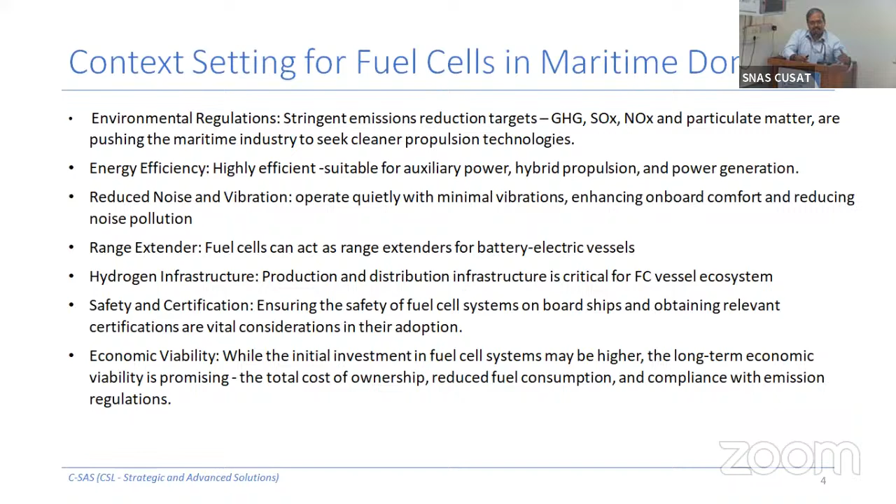Secondly, the energy efficiency is highly efficient when you compare it with IC engines and related technologies. The efficiency we have now is around 56%, and we can extend it further by absorbing more heat from the other process parameters.

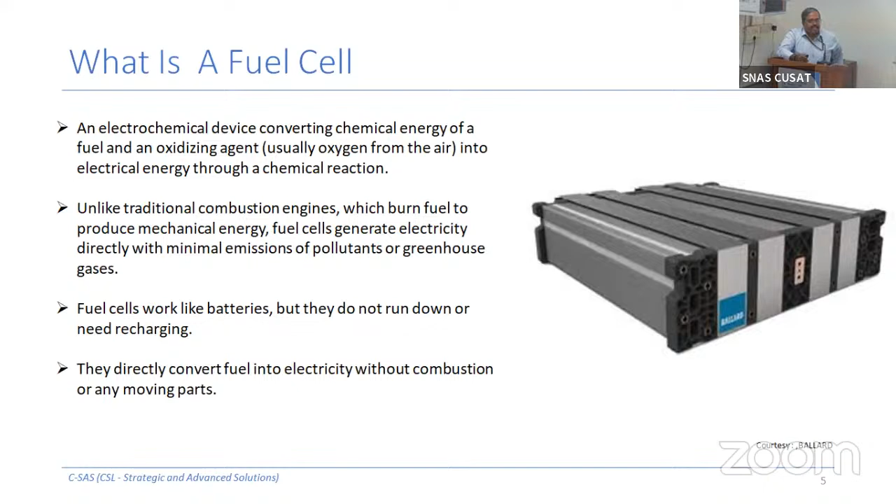I think this has already been covered. What is a fuel cell and how does it work? This picture is actually a fuel cell stack supported by a company known as Ballard.

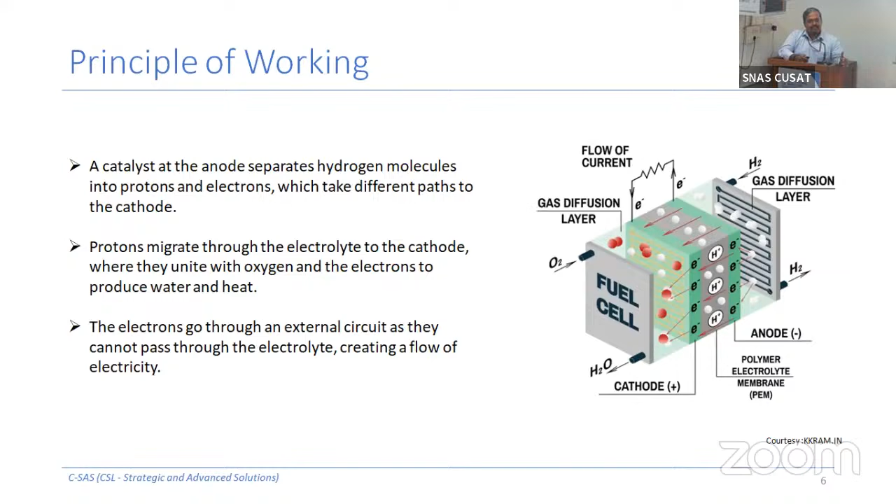I will also skip this because I believe the working of the fuel cell has already been covered. So this is very important, you see here.

Typically, an installation of a fuel cell on board a ship comes in the form of a 40 feet container with one part handling the fuel cell, known as the BOP, balance of plant. This will be a fuel cell plus a battery part integrated onto it. So you will see only a container on board the ship.

It is something like a plug and play system. If you are planning to integrate within the engine room, then this entire fuel cell stack and BOP will be a fixed component. You can either do it as a containerized solution or a fixed solution, but typically what we have seen is that the adoption is happening with respect to a containerized solution, so that the entire thing can be plug and play.

So we will also understand what are the typical fuel cell technologies which have been experimented over a period of time in the maritime space. This proton exchange based solution - from international research we understand that specifically the proton exchange membrane and solid oxide are the two promising technologies which have been leading the show.

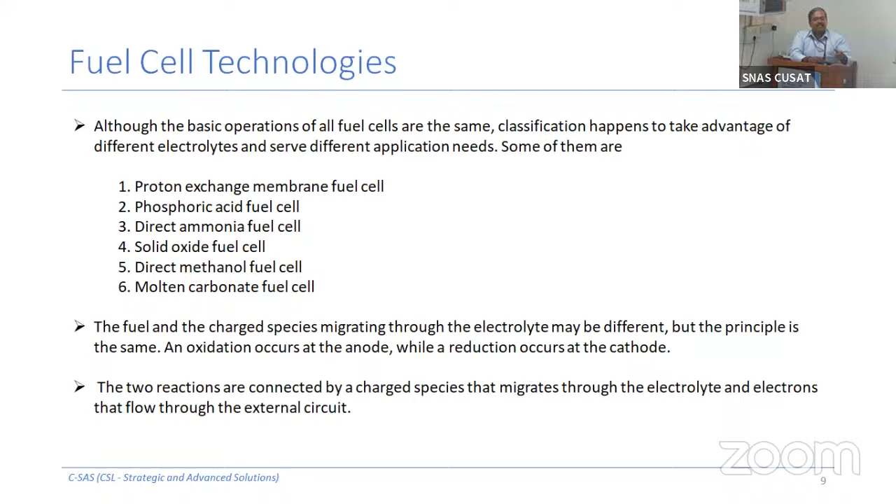So what was happening was that when we had initially envisaged this solution and were ready to start the trials, nobody was willing to onboard the ship, because people were really scared and had a feeling of fear. So we had to do a lot of sensitization, and we also needed to create standard operating procedures to ensure all the people and the safeties are compliant. So it was a cultural change which happened in the shipyard when we were doing this.

Second, you also have to understand, when we are putting something on board a ship, it should comply specifically with IMO, the International Maritime Organization Convention and Codes. Then there is the International Association of Classification Societies, IACS, and IRS is also a member, and IRS partnered with us in this project. So there are a lot of international standards we need to comply with, and we also need to comply with technical standards such as ISO, IEC, and IEEE.

So initially, for all these things, we do something known as a gap analysis. We analyze each subsystem to check whether it complies functionally with the relevant class standards. If not, then we take methods so that the gaps can be mitigated to ensure the system is compliant for a maritime use case.

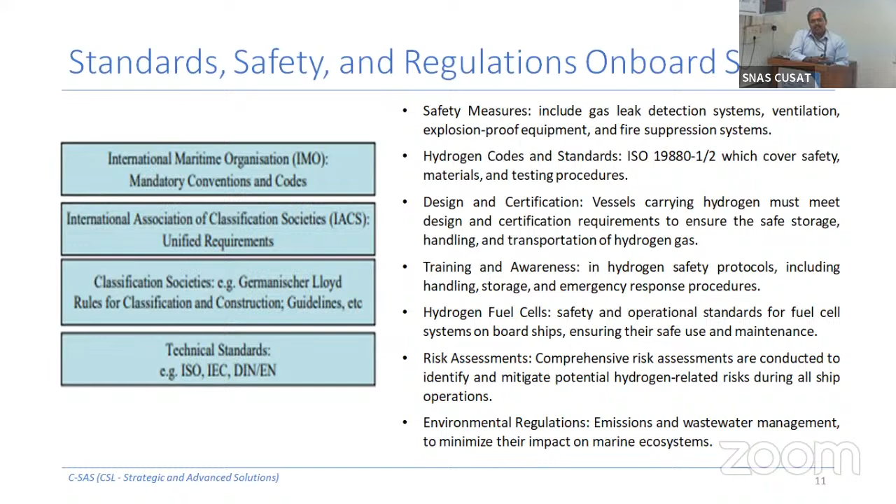The next part is that once we are done with the gap analysis, we create a solution useful for the maritime use case. First, we try to understand the operational condition and profile of the ship: how many hours it will normally run, how many hours will be available for charging, what infrastructure will be available, whether a battery-based solution will be available, whether shore charging will be available, how many continuous hours will be required, what is the endurance for the ship, and do we have a possibility to recharge the hydrogen on the go.

Based on all those things, we choose the fuel choice and the hydrogen supply system. The third point is very critical - we have to understand the footprint, that is, the weight and sizing limitation. This is a very critical thing.

As you are aware, from the propulsion and sizing perspective, the propulsion train will typically require a minimum megawatt range power to create this kind of long duration, long endurance solution. Based on that, we have to select the fuel, whether we will use gaseous hydrogen or liquid hydrogen, or a hydrogen carrier, so that we can optimize on the footprint.

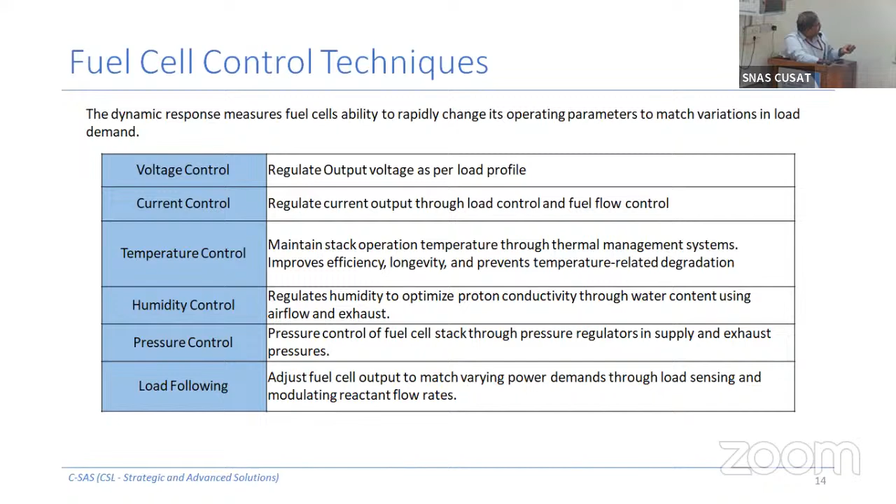In a similar manner, we have done the temperature control, humidity control, and pressure control. Now, this is a very important slide because these are the critical integration facilities available, since the fuel cell is comparatively slow in responding to peak power load. We can use any of these parameters or options to ensure that it responds to the dynamic load requirement.

In our case, we have used batteries. In future, probably we will use a combination of batteries and supercapacitor, because if we use supercapacitors, the advantage is that every battery has a minimum number of charge and discharge cycles available. So if we combine it with a supercapacitor, the battery usage will be reduced, giving a more optimized solution. Typically an LFP battery will have a life cycle of around 3,000 cycles. If we use a supercapacitor, it has 1 million cycles.

But you have to also understand, we cannot give up the full power in kWh to this supercapacitor. So we will use it for a very particular, limited capacity only. Since supercapacitor is very expensive as per current technology, we will use it in such a way that it becomes a hybrid battery, ensuring that response to the dynamic load is curtailed mainly around 80% by the supercapacitor. If that is not sufficient, then only the batteries will be used, giving some breathing space for the fuel cell to come up to that level using load control.

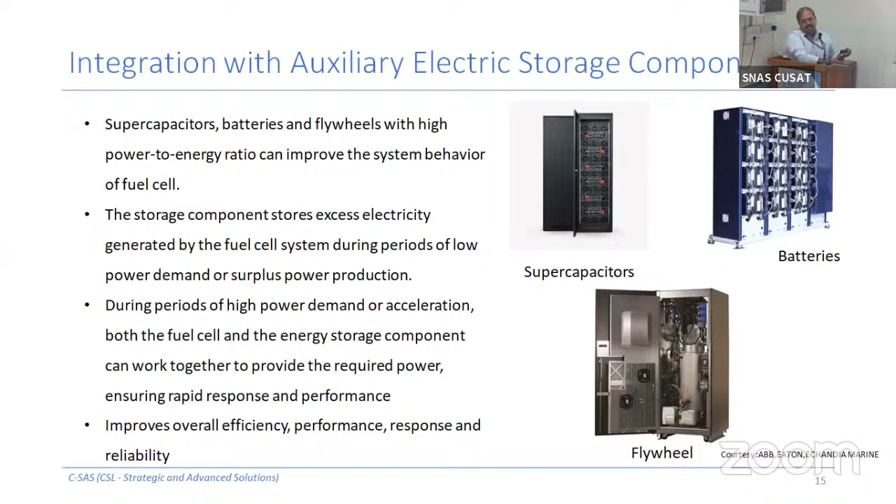Coming back to the typical powertrain, how it works is we will initially have the hydrogen storage. This will be limited, as we have discussed, whether it is gaseous, liquid form, or through some hydrogen carrier, limited by the profile of the vessel. Then we have the fuel cell modules. Then we have batteries, switchboards, and power electronics, with the shaft and the propulsion system coming into place.

So now coming to the actual thing. This is the project we have conceived, and I'm very happy to be leading this team for doing this solution. We can proudly say that it is a full homegrown technology.

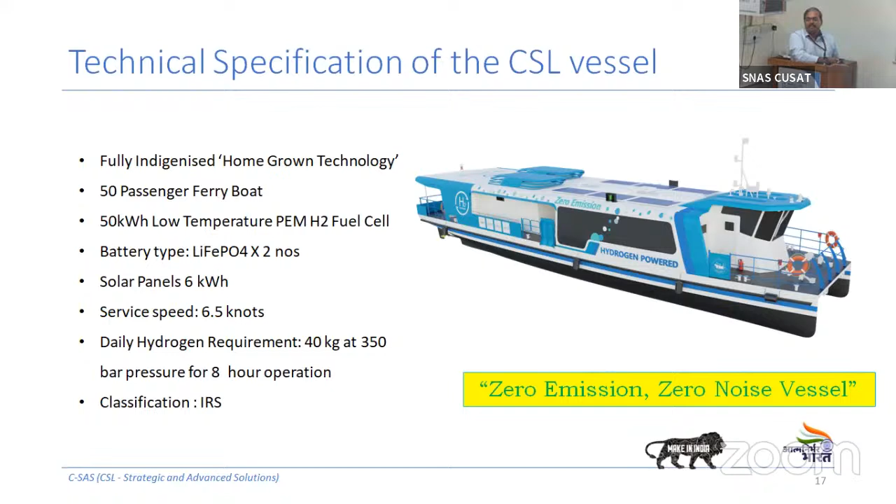So what were the hazards we have identified? First one is that high energy collision penetrating the hydrogen cylinder. So what happens if there is a vessel collision happening, the Type 4 cylinders what we have used will survive those things. And if there is a problem happening, there is some air venting mechanism which will do a controlled venting, so that since it is only 40 kg, it will be vented within a very short period of time. Rupture of cylinder is also handled in the same manner.

Vessel collision penetrating the fuel cell power installation: if some internal leakage happens, then the entire solution will shut down. And if there is a leakage happening in any of the valves or connections, we will detect the loss of hydrogen. If that rate is coming very fast, then we will shut down the solution. And when we are bunkering the hydrogen, if there is a leakage happening also, the system shall be shut down. And failure of electrical power conditioning system.

That means assume that when the vessel is running and the fuel cell is fine, but the output unit failed. Fuel cell is fine, but this one failed. Then what happens is that we will shut down the fuel cell and the vessel will run on batteries to the nearest port. So all those things we have actually modeled, and we have identified that these are the hazards available.

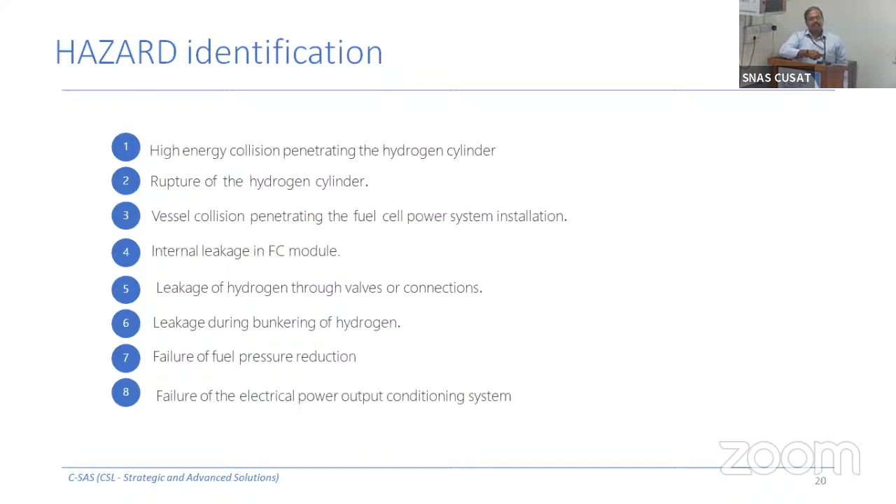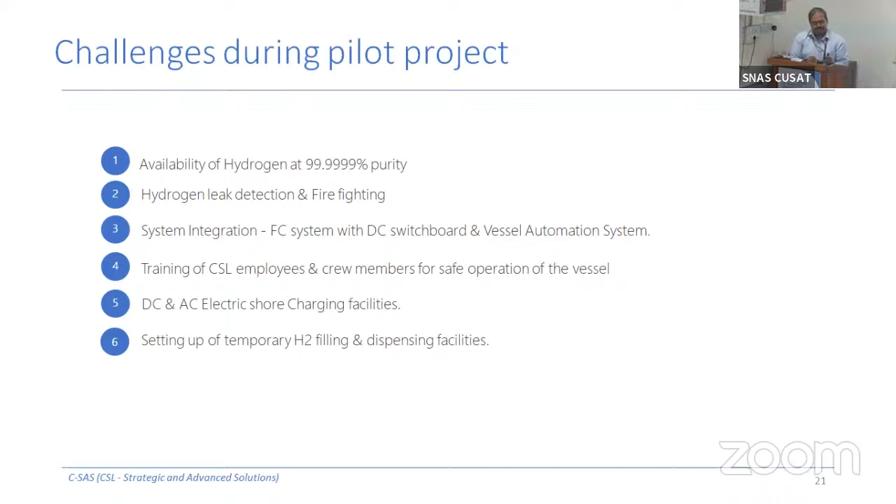Another very important thing was that since the fuel was not available, we had to set up a temporary fuel filling and dispensing facility, which we got approval for from PESO. Since we were only doing 40 kg, they were not very stringent about it, but we still had to do a lot of work to create that. With that, I conclude my presentation. Thank you.

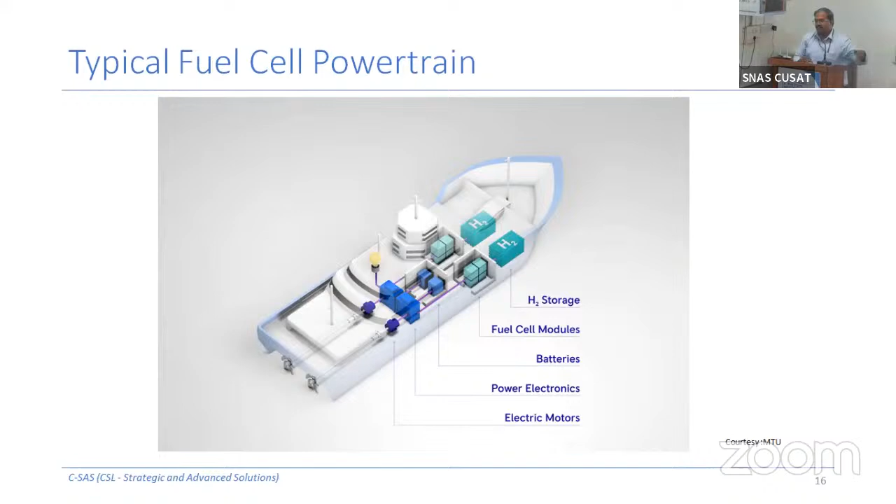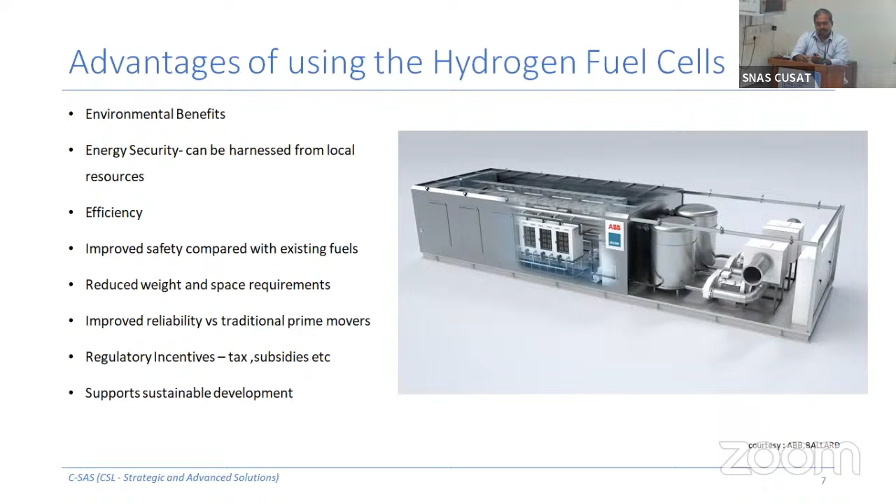So this ship is working in a hybrid mode or is it completely fuel cell? It is always in the hybrid mode, because when it is running, the load demand from the propeller is actually transmitted directly to the bus. So this bus will have the variance, the power will always be varying. That variation response will be done first by the battery, because the battery is directly connected. You just discharge. So our choice is to ensure that when it is discharging, we compensate that rate to ensure it will not discharge beyond a point, so the depth of discharge is limited, and the state of charge will always be maintained between 85 to 65.

So beyond 65% means the state of charge is available for 65%. Beyond that, we will not try to discharge typically. If everything goes bad and this is not available, the battery can discharge up to 20%. State of charge will be 20%, meaning 20% energy will be available, because it is required so that we can take it to the next port. And the important critical thing is that if deep discharge happens for the battery, it is very dangerous.

And one fuel cell layout you have shown, in this SLD, it is mentioned that you have to maintain fuel cell stacks at 60 to 80 degrees Celsius. So if you're not doing this cooling, heat transfer cooling, what will the rise of temperature be? What happens is that if the temperature can go up to 85, then we'll trip the system. That is what we have done.

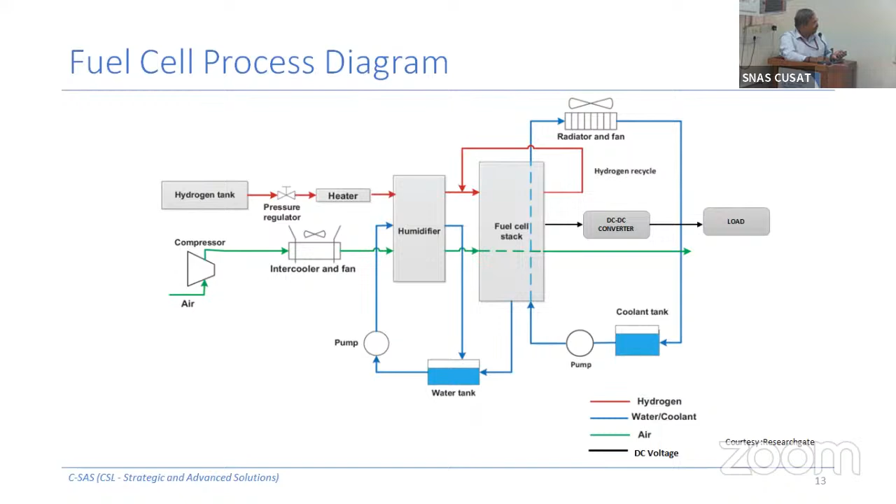See what happens is, let me tell you frankly, when we started this project we were thinking that DC switchboard was very easy, because we have years of experience in AC switchboard, there was no problem. But it was absolutely wrong. That was the hidden risk we understood, because even though DC bus doesn't require any synchronization, since DC bus means there is only positive and negative, there is no phase, we thought it was very simple.

No, the selection of the contactors, we need to select something known as pre-charge. You cannot simply close the battery terminal voltage directly to another battery. You have to do it through a pre-charge. All those things, if the timing is not correctly done, we will lose that cell. And the selection of the fuses, those were semiconductor fuses, because it has to respond fast. The tripping of the things is based on semiconductor fuses, which act very fast. So that was a hidden risk.

Now, if tomorrow we use new techniques for these things, then this is an added parameter in our existing timeline, which we may not succeed in, because that was not the primary motive. Our primary motive was to prove that it is possible to integrate a fuel cell on board a ship. That was the primary motive. So we didn't do that. Probably in the next optimization, we may do that.

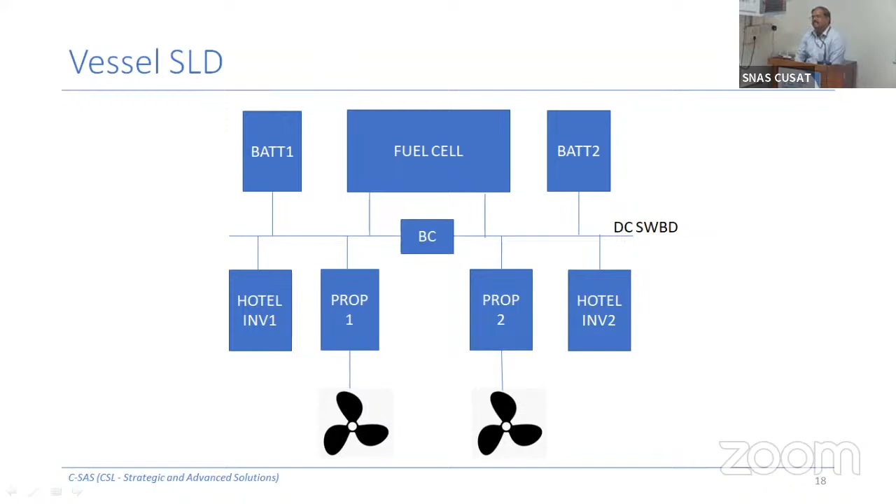Thank you very much, sir. Thank you for a wonderful talk. Listening to one presentation from an academic institution and another from an industry is very nice. Thank you very much.

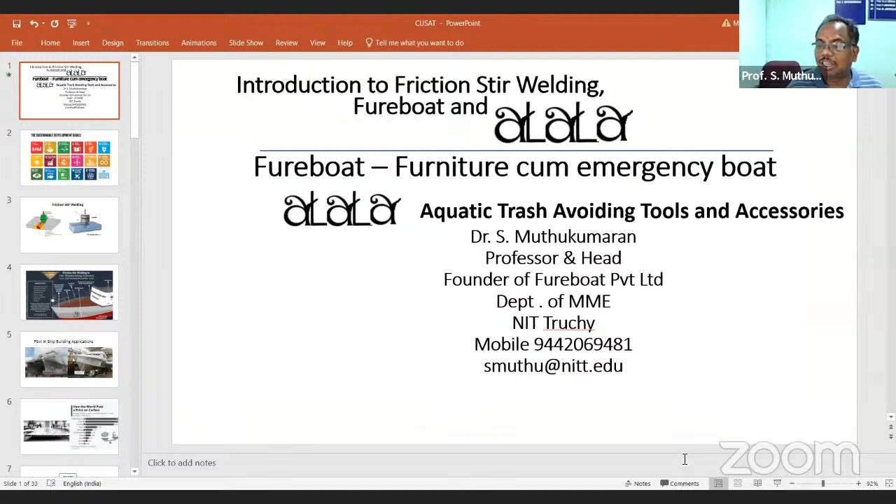First of all, I am thankful to Professor Madhiyadagan, the head of the department, and Professor Sivaprasad, sir. I have been collaborating with them for nearly 2-3 years. Professor Madhiyadagan belongs to NIT Trichy, he is also an alumnus of our NIT Trichy, and I'm happy that we have very good collaboration, and I'm sure it would continue. Now I am going to highlight friction stir welding, Fureboat, and trash removal equipment. I felt I am an odd man out because I am less related to ship work, but I can share my experience and contribution at this forum.

We now have the Sustainable Development Goals. The UN gave these goals because due to climate change we are facing a lot of issues - frequent flooding, like the heavy rain happening now in Chennai. This has become common. Some countries faced five floods in one year. The UN is very keen on addressing climate change, which is a very big issue. There are 17 goals; among these, life below water and climate action are very important. Climate action is very important, and the ship department plays an important role.

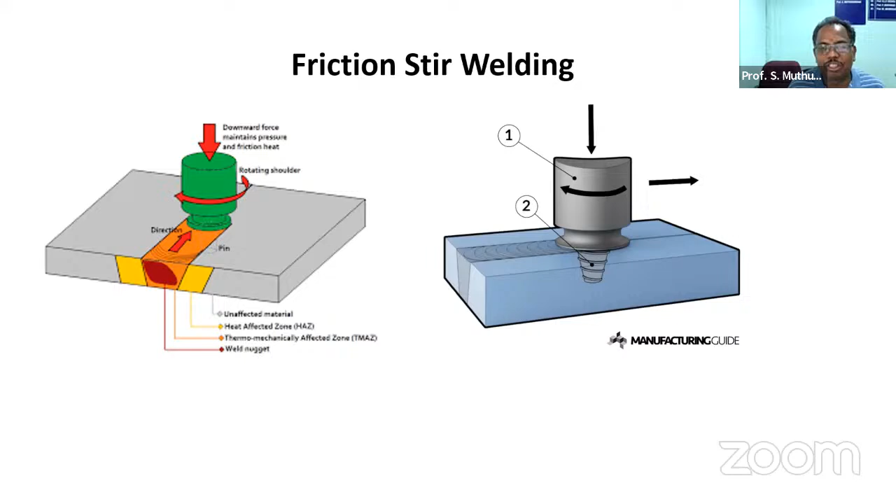Yes, we can do some innovation. It's not that only people in the US or NASA can do this - we can do it from India, we can do some good work. That gave me a lot of confidence. With this confidence, I did some work. Let me share those works.

In shipbuilding, I hope most of you are aware of the friction stir welding process. I'm not going in depth about the process - basically 2 plates are fixed and the tool runs. That's all - there is no filler, no shielding gas.

There is no hazard, no fume hazard, because metal arc welding gave rise to more than 35 diseases due to the health hazards it carries. But here there's completely no smoke, no melting, and when metal melts, a lot of issues happen like oxidation - here there is no oxidation. We have many advantages with this process.

Even a 30 mm thick plate we can weld in 2 passes. There are a lot of advantages - some other occasion, let me give an exclusive presentation on friction stir welding. Now let me highlight only the application point of view.

In shipbuilding, yes, it is widely used in developed countries. These are some of the components - we can weld honeycomb panels, hull, deck. Particularly aluminum is very simple to weld because the tool design is very simple, but steel also, people are now successful in welding.

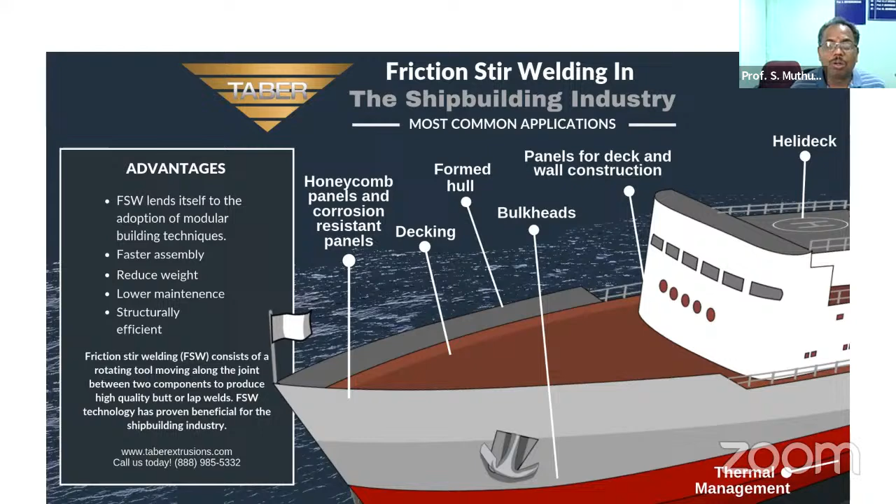Even oil pipelines are welded nowadays by friction stir welding because there is less energy consumption. This is actually a ship - wherever you see a line, that is the place welded by the friction stir welding process.

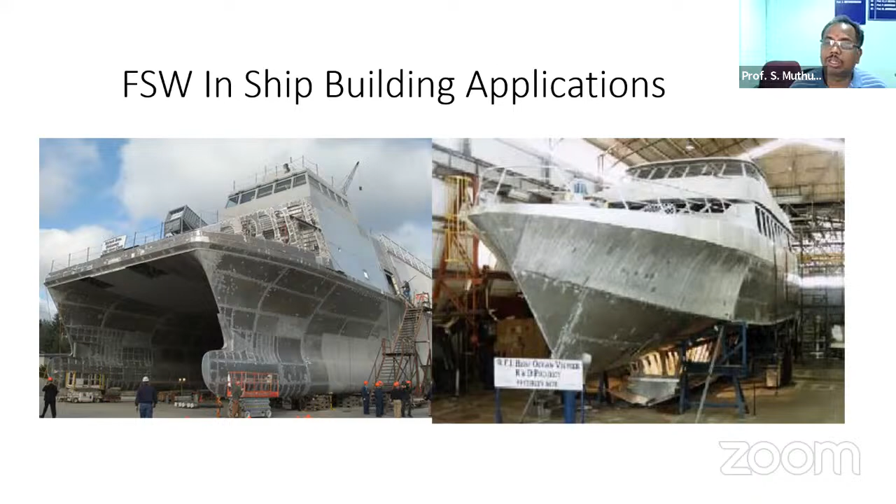It may not be feasible for us to manufacture a complete ship right now in our country, but at least we can plan some panels - at least some of the panels in shipbuilding, particularly aluminum. I think we should explore this.

I had a lot of discussion with the Cochin shipyard, because now the carbon tax - you can see it is going to be high. This particular process consumes only 5% of the energy consumed by laser welding or any other process we currently use - it is much less energy consumed. So energy saved is important - we need to conserve energy.

Less energy consumed means less carbon emission, because we mostly get power from thermal power plants, and some emission happens there. So we need to save energy, and this is a very energy efficient process. That's the main advantage. Roughly 5 to 10% energy is consumed compared to other processes, and some processes consume only 2% of the energy consumed by other processes. So this is a very energy efficient process.

Definitely carbon tax is going to be high in coming days because of climatic changes. Immediate action should be taken. Now we can see in Delhi, our capital, the pollution level is very high. So definitely we are going to face carbon tax. Now it's the right time to think about green technology.

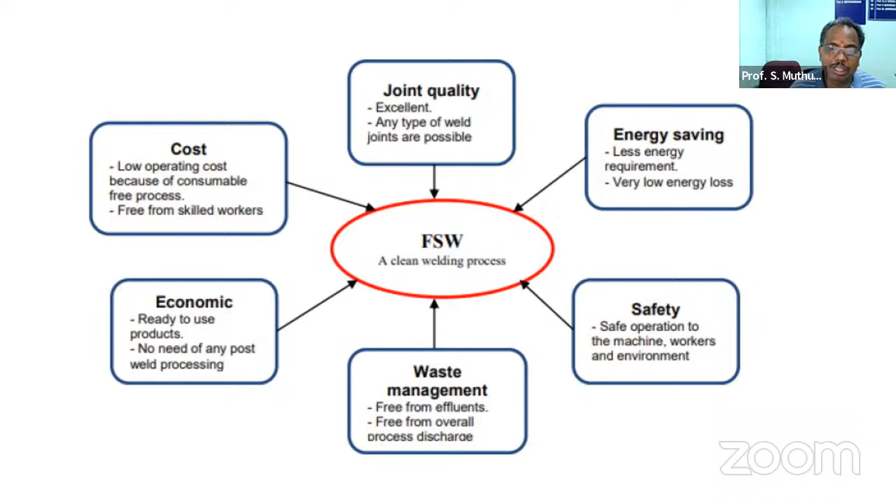That is the main advantage with these processes though - we are free from emission. We can see a lot of advantages with these processes. So at least, even though it is not possible to adopt 100% in manufacturing and fabrication, instead of aiming for that, at least 5 to 10% we can easily work with. And through research, we can improve that to 20%, 25%, 30%. That is what research should focus on. So definitely we still need arc welding processes, but this can be used as a better process wherever it is feasible.

This machine is available in our NIT Trichy. Very few institutions have this machine available. I made some attempt and I could get this machine in our lab. Around 12 students completed their PhD under my guidance in this process and different allied processes, friction stir welding and allied processes. I welcome any research or collaboration. It's my pleasure, and I extend my warm welcome.

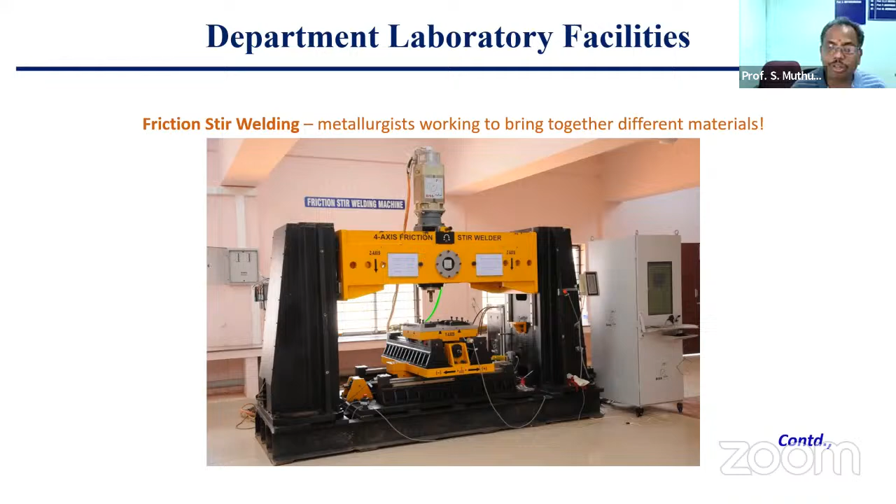We did a lot of work with ISRO. My group, my scholars, did work and we got some projects, and many people got PhDs related to ISRO projects. With this introduction, let me show these are the patents granted. Basically my work is friction-based welding process. These are 8 patents granted, and some patents have already been transferred to industries.

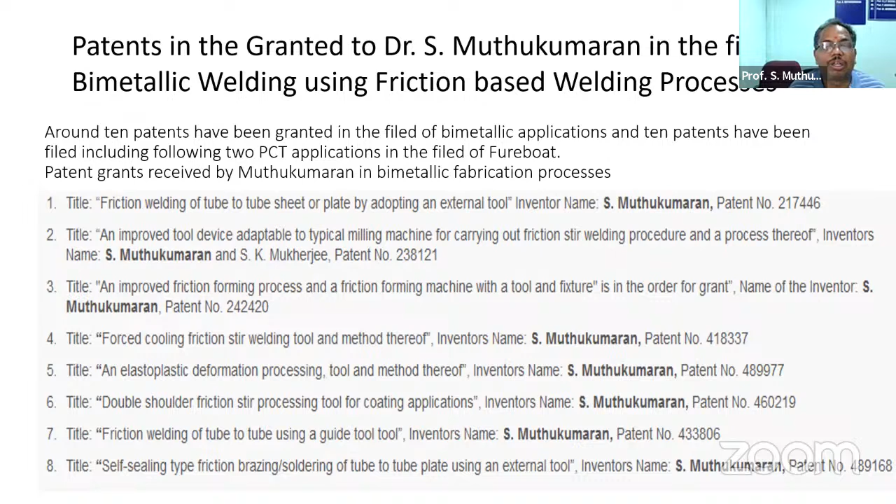Based on the experience I gained in friction welding, I developed a new process to weld tube to tube plate, used in heat exchangers. The tool simply moves, rotates and is lowered, and the tube plate gets joined. Along with my students, I worked on this process, and 4 students got PhDs in different combinations including NDT. We published in most of the journals about this process, which I named friction welding of tube to tube plate using external tool - to weld tube to tube plate without using any shield gas or filler material.

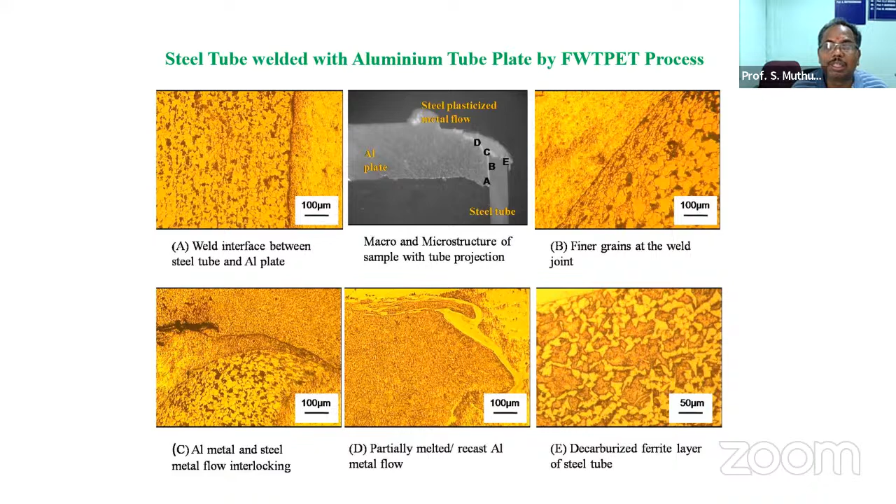We did work with titanium, and did a project with IGCAR Kalpakkam for nuclear application. In the UK, I got a project along with Leicester University to explore this process, and we published jointly. This definitely has a lot of applications in automobile and different manufacturing units. This is a bond interface after tube to tube plate welding - it will have a metallurgical bond, and this has a lot of advantages compared to other welding processes.

Let me run a clip of video showing such a tube to tube welding process, where steel is welded in the friction welding machine.

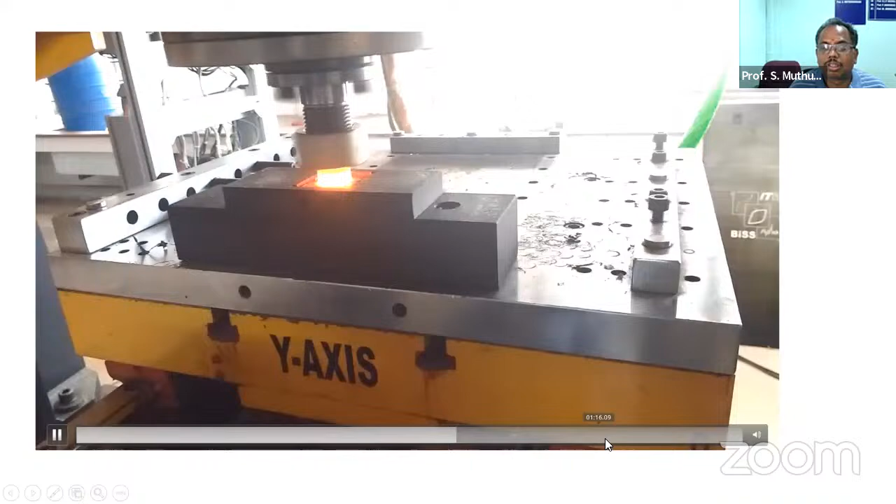Steel shows a color change whenever it is heated, but aluminum doesn't show any color change even after melting. So the video I shown is tube to tube plate welding of steel, tube to steel plate. We also welded steel to aluminum.

With this experience, I visited shipbuilding industry and many industries to know what is happening, so that the technology we developed could be transferred. Then I learned that bimetallic welding is very important. You can see the left side, the hull is made by steel and the superstructure is made by aluminum, because it gives better stability and also some defense. So it has a lot of advantages. Then I understood this is the area we need to explore.

Right now, the transition joint, aluminum to steel, is welded by explosive welding, and it's very expensive. Another thing I noticed is during fabrication, using the transition joint made by explosive welding, intermetallic formation is a very big issue, so they're going for cold welding. With the experience I gained, I thought this area needs exploring, so that it would be very useful to shipbuilding.

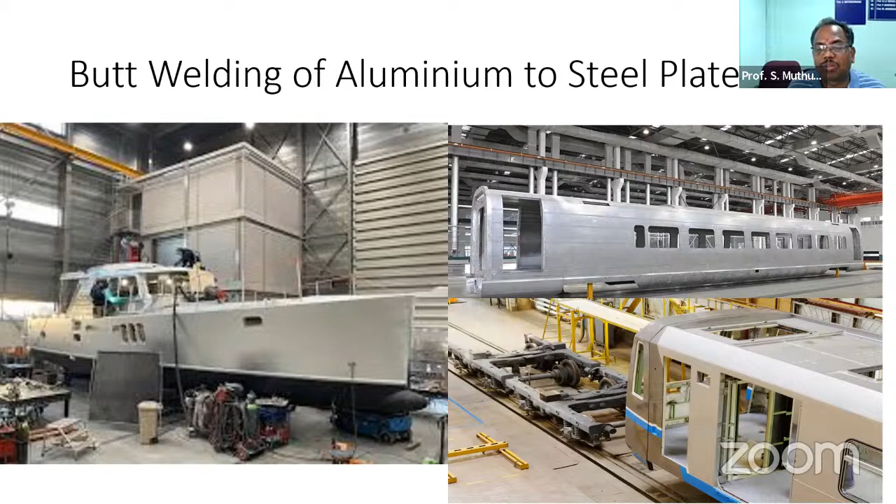Our Indian Railway recently started using aluminum body, so they also have a lot of application for this transition joint. With this experience, I developed this bimetallic strip welding. I think I have one sample, I'll show that later.

Bimetallic strip welding, by friction route - the process I developed is not friction welding. One side is aluminum, other side can be steel, and it is a metallurgical bond as well as mechanical interlocking. A good point about this process is the special cooling circuit incorporated in the welding itself, so that in fabrication there won't be any intermetallic formation. So we can go for pulsed GMAW and carry out ship fabrication without any difficulty, because right now intermetallic formation is a very big issue, but the weld I made, I already tested. The transition joint I prepared between steel and aluminum has no intermetallic formation at all.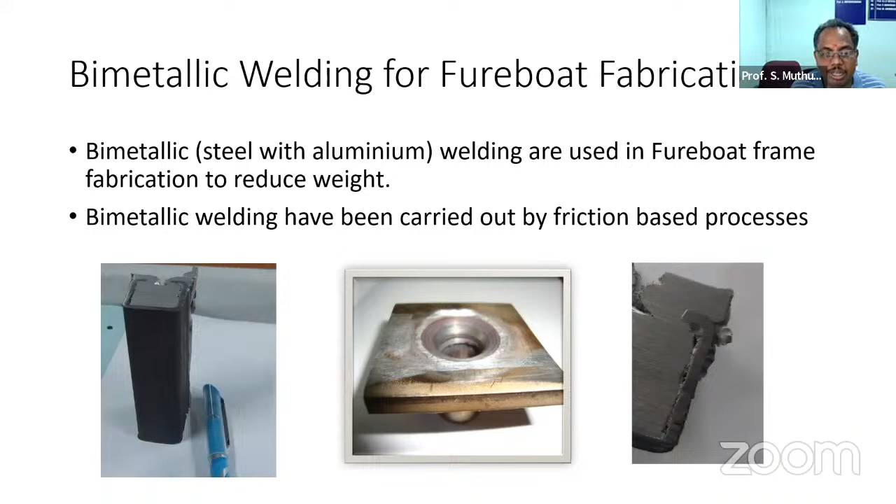So I filed this, and now I am exploring. We are working with collaborators, and Professor Madhivanan is also involved in our research, and we are trying to establish this as a process, particularly for shipbuilding. We hope within a year we could give this technology transfer with standards. That is our direction.

The second part of my presentation is Fureboat, as mentioned during my introduction. FUR for furniture, E for emergency, BOAT. If you Google it, you can find a lot of videos about this.

For any invention, my interest is also IPR, intellectual property rights. I used to handle IPR as a global elective for my students, and I got the opportunity to serve as IPR head for 6 years, so I learned something about IPR. Whatever invention we do, we should give a special name for it, because later if you search in Google, only those related to that invention will come up. So I framed the name - this FUREBOAT is a coined name by me, and I trademarked it.

FUR for furniture, E for emergency, boat. If you search Google, you can find a lot of articles and video clips about this. So that gives some uniqueness.

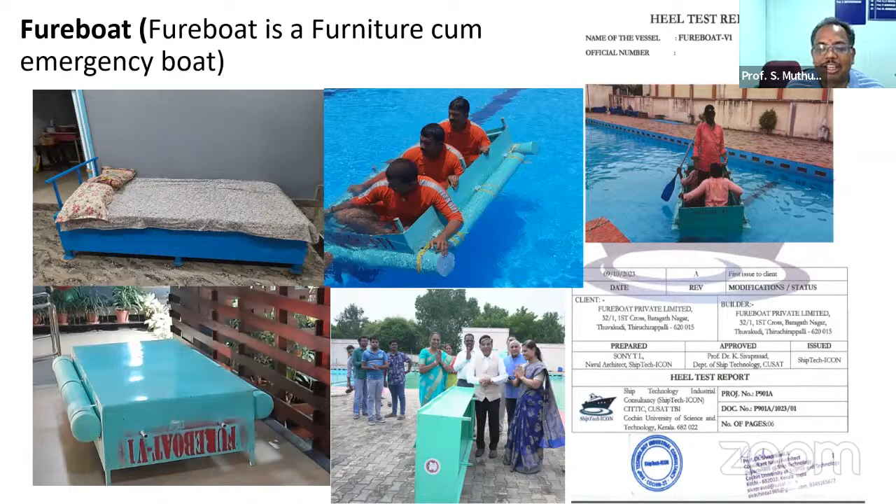The Honorable Minister Sarkar released the first model of the FUREBOAT. I am happy that it has served a lot of people during floods. Now also, 3 FUREBOATs I have given to Chennai Corporation, and they're using them even today, since there is a lot of water logging and issues there.

So this is very handy and very easy to transport, and we have a lot of advantages. Just let me show some selective video clips.

Sir, is the video clip visible? Yes, we can see it. Yes, we can see it.

Sir, what is it made of? What is the base material? Yes sir, yeah, so one slide I have, let's show you.

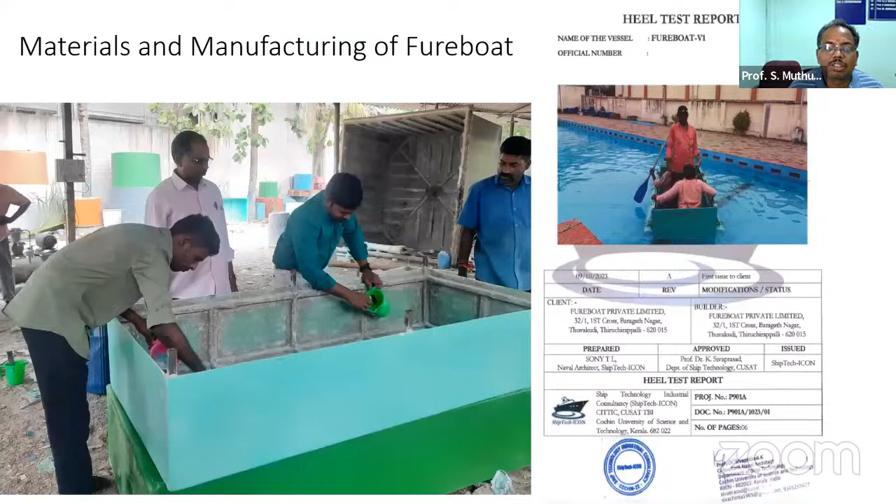So this is the Fureboat manufacturing process. It is a frame around 35 kg steel frame that can be reduced, but I gave excess design. The steel frame is made first, then a mold is created. In the mold we keep the frame, and we lay layers.

Five layers of glass fiber mat were used with epoxy resin. So by this we can manufacture this Fureboat. It is glass fiber and epoxy resin with a steel frame. So this is the manufacturing method.

I trained our scholars also, and now I am using this. I am collaborating with a boat manufacturer, and I have trained the boat manufacturer to make it. Once this is given, suppose wherever there is a flood risk area, this can be used as furniture.

Just like we have a fire extinguisher, wherever there is flood risk, this can be used as furniture. So in case of emergency, they can flip it and use it as a boat. So that is the background of this.

And now we are developing a Fureboat where some parts we are planning to manufacture using mycelium. Mycelium is a fungus, so it's a fungus-based material. That work we are doing now.

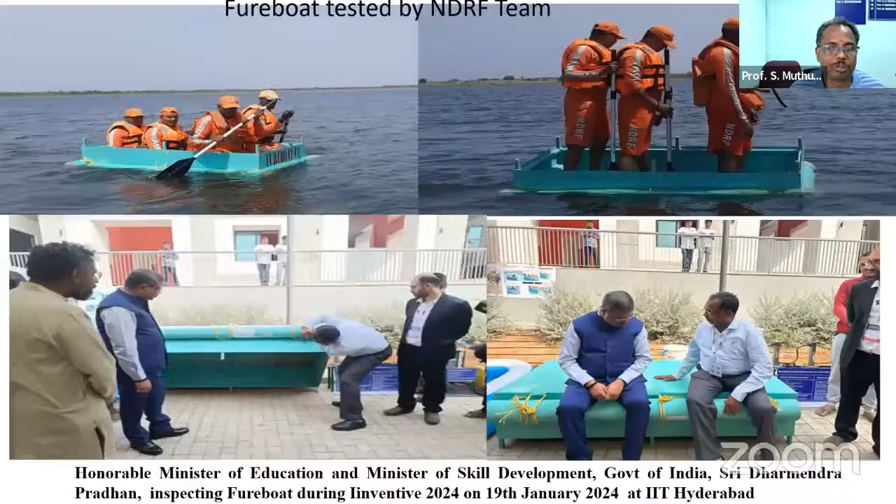The Honorable Minister Dharmendra Pradhan inspected this during '24. Definitely now flooding has become common in our country, and I hope this would be useful to the people.

Another application of the Fureboat is that it can be used as furniture in passenger boats, because right now we are giving a life jacket as safety equipment. Many people do not know how to use it, and moreover small kids and aged people may not know how to use it, and they may not be able to use it at all.

In case of boat capsize, this can be used as a rescue boat, because we cannot keep a rescue boat in boats, but this can be used as furniture. I approached Cochin Shipyard and gave a demo in backwater. They are fully convinced, and I hope this will take up.

Another application is on the right side. It can be given to fishermen as an ice box, by keeping insulation. In case of fishing boat capsize, the content can be thrown out and they can safeguard their life and avoid sinking, because fishing is considered among the most hazardous and risky professions, and every year thousands of people are killed globally.

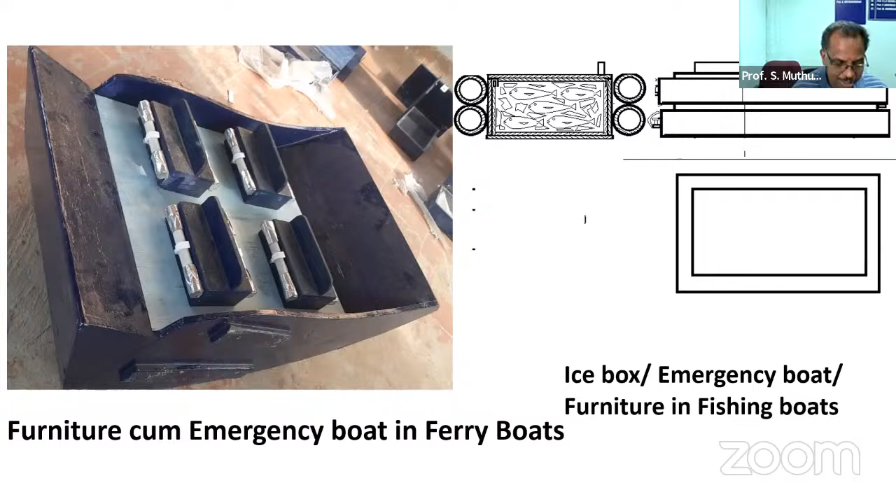Moreover, this technology, the Fureboat, filed internationally through the PCT route, which gives protection in 165 countries. I got a very good report to share - this fulfills the conditions for patent filing, as given by the PCT. So wherever country we file, there's more opportunity and scope to get the grant. I'm looking for international collaboration to file jointly and reach this to the public.

There is no such product available currently, and while this is simple, it has the application. Another application is the education sector, because in our institute I tried it and it worked well.

The new education policy is insisting on out-of-classroom teaching. So I took the Fureboat into a swimming pool and could teach center of buoyancy, how to resolve forces, center of gravity, and metacenter. I could see the interest shown by students - they show more interest when we teach this practically, instead of on a blackboard where it may not be as interesting.

This has a lot of application in the education sector. In the fluid mechanics lab, they can definitely add 2-3 experiments, giving better understanding not only in the ship department but also in the mechanical department. So this is the next step I am showing.

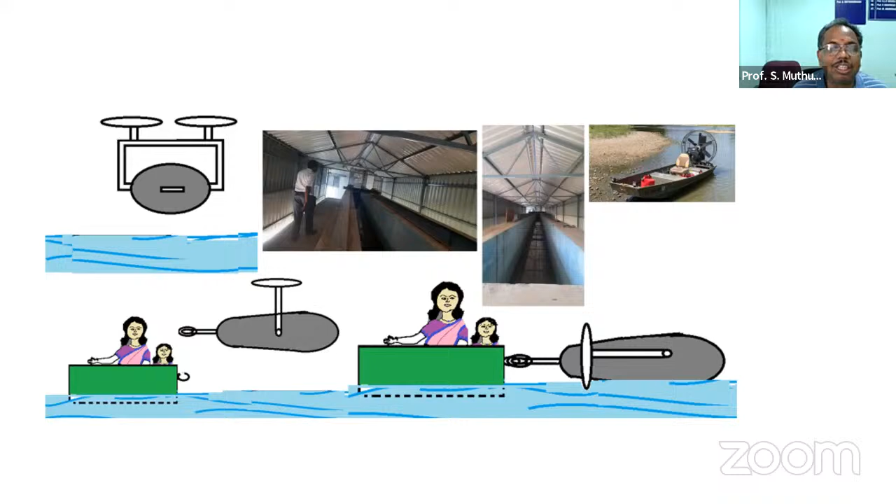So it flies as a drone, and after coupling it's like a fan boat, propelling them to a safer location. This needs a lot of studies, but we started working in this direction. This has many applications, and I already highlighted the flood rescue and AI-based aspects.

In future it may come, but we already started some work. Boat applications include furniture, emergency boat, ice box, and pond fishing, rod fishing. This is the best solution for that. And cleaning operation - this can be used in many ways for cleaning.

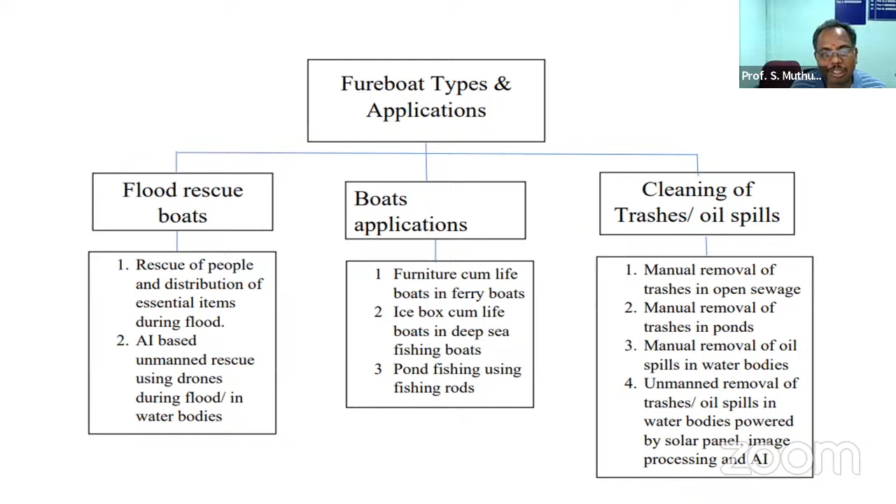When I took part in an exhibition in IIT Hyderabad, after the exhibition the director requested this Fureboat because they have very good ponds. They requested it for cleaning, so I donated it. It definitely has application in keeping the pond clean, and because it's affordable, on other days they can keep it as furniture. That's the advantage of this boat.

This is another patent I filed. IIT Madras, Shaastra magazine, interviewed me - it's available on Google, a 1 hour interview available on YouTube, anybody interested can see it. My intention is to help people, so I am very open. Even some free licenses I am willing to give, and if people get benefited, we are happy. That's the main thing I shared in my interview too.

So then trash removal - when I try to remove trash with the Fureboat, sir, can I take another 10 minutes? Five minutes, sir, five minutes. Okay sir, no issue. Thank you, thank you.

Trash removal is a big problem, and water trash is a very big problem. Now we use very large machineries for small ponds. I thought with the Fureboat I should develop an attachment. When I developed it, whatever goes inside, that comes outside. That triggered me to develop one interesting device. Then I think I can show this.

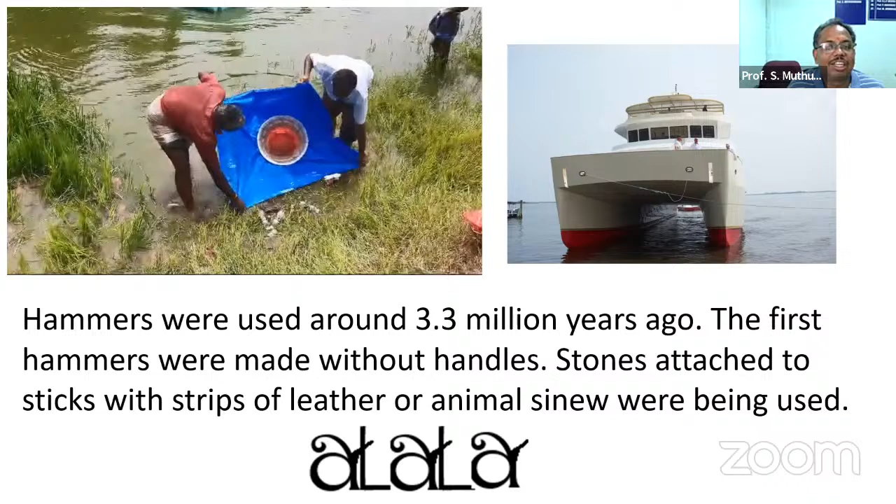There is one non-return wall, you can see, very interesting. This is simple, this can be fixed with a handle also. You can see whatever goes inside, that cannot come outside. You can see there is a non-return wall in this - nothing can come out. So the main thing is the non-return wall.

What I designed will allow everything in - even a small leaf can go inside, but it cannot come out. This patent is an order of grant. This can be fixed in the boat, in a catamaran type boat, so that all trash will travel while moving. The trash can be collected, and in parallel, while transporting people, we can clean the water body.

I am holding discussions with authorities in Kochi, and Professor Madhavan is helping me, and soon we will have a trial. I am ready to share the technology with the water metro, so they not only transport people but simultaneously cleaning can also happen, because the non-return wall won't let anything come out. This can be explored with the help of people.

As a hand tool, the Government of India, during Swachh Bharat functions, started distributing this particular device as a hand tool. This was a DST function to celebrate Swachh Bharat Day, Gandhi Jayanti, so they distributed it to workers in the Northeast. Slowly it's getting popular because it's a simple tool to keep the water body clean.

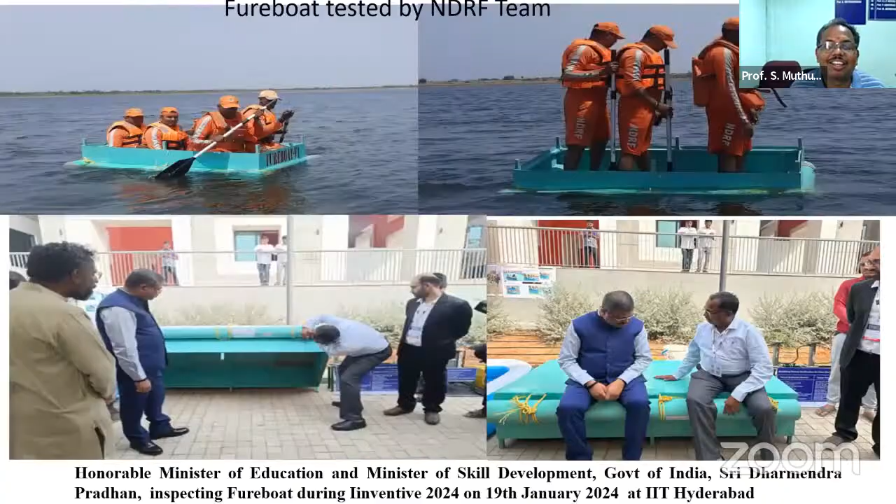Actually sir, that is my invention. I'll show you that particular slide. On the right side you can see it is my invention. I invented this process in 2006 and got a patent in 2008. I named this process friction welding of tube to tube plate using external tool. It is exactly in between friction stir welding and friction welding - it uses an external tool, but the bond interface will look like a line interface.

So this is my invention, and 4 people explored it - NDT and strength aspects - and we published around 25 papers on this. Now people abroad also started publishing papers on FWTPET. If you Google FWTPET, it will come up. I invented this process, friction welding of tube to tube plate using external tool, in 2006 and 2008. If you're interested, I can share the articles, sir. I am ready to share the articles.

Another question - is it possible to join aluminum alloy with copper using friction welding? Yes sir, tube to tube plate we explored, and we published some 3 papers on aluminum to steel and aluminum to copper joints. Yes, tube to tube plate we were successful.

And regarding a transition joint, that can be explored by the recent process I showed - the longitudinal joint. That also we can take up. But sir, aluminum and copper have a huge difference in thermal characteristics.

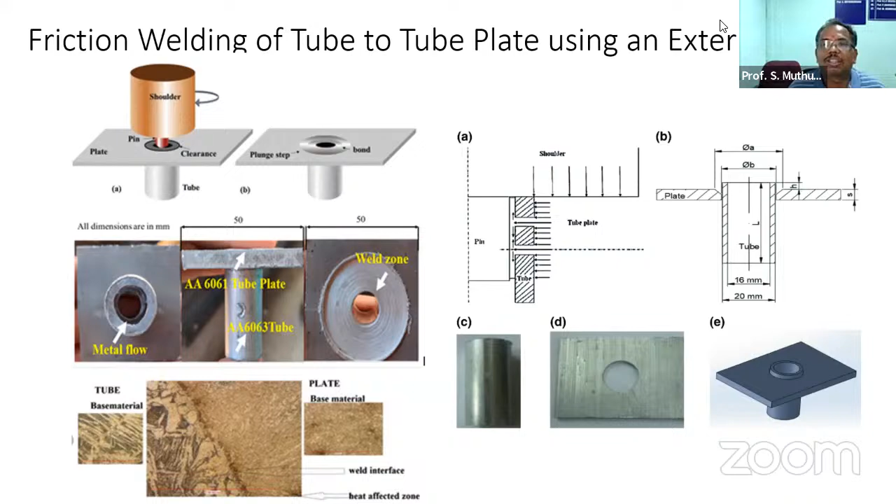Thank you, Dr. Muthukumar, for your engaging and insightful presentation. We deeply appreciate your time and effort in sharing your knowledge with us today. With this, we conclude this session. A heartfelt thank you to all the speakers and the session chair for sharing their knowledge and expertise in the field of eco-friendly ship innovations. I now invite Dr. Sadish Babu PK, HOD of the Department of Ship Technology, to present a memento to Dr. D.D. Ebenezer as a token of appreciation for his guidance throughout this session.